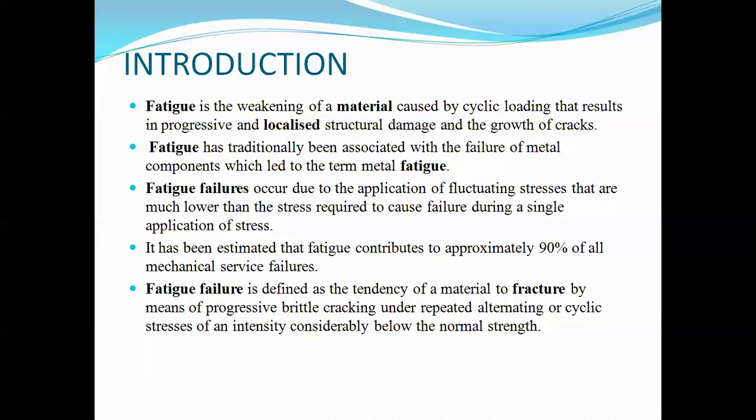Factors governing fatigue failure. Why does fatigue failure take place? Because of stress concentration. What is stress concentration? Whenever there are sharp edges or corners, if a cross section of the material has a sharp corner, then at the sharp corners or curves, stress concentration may occur.

Actually, fatigue occurs due to the applied fluctuating or repetitive cyclic load, due to crack initiation and cracks developed over the outer surface of the material. It can also initiate in the grains or grain boundaries, but it has a tendency to make marks over the outer surface of a material. If a material has such impressions, there is a sudden rise in the stress concentration, and due to this the fatigue failure can take place.

Corrosion is a detrimental effect because, in the presence of corrosion, the core material is enveloped by the oxide layer, and whenever the external load is applied over a body, these layers suddenly break, showing slow progressive deformation, plastic deformation, and fatigue failure takes place.

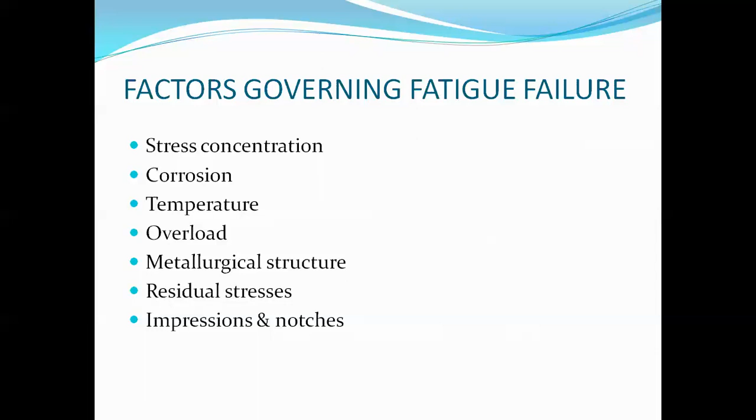Fatigue loading conditions. What are they? Fatigue loading conditions are generally of two types: isothermal fatigue and un-isothermal fatigue. From the name, it is obvious. The temperature is constant; that is why it is isothermal. Stress or strain, these two parameters are variable according to the material or conditions. And here the temperature is variable and the strain is variable, but stress is constant.

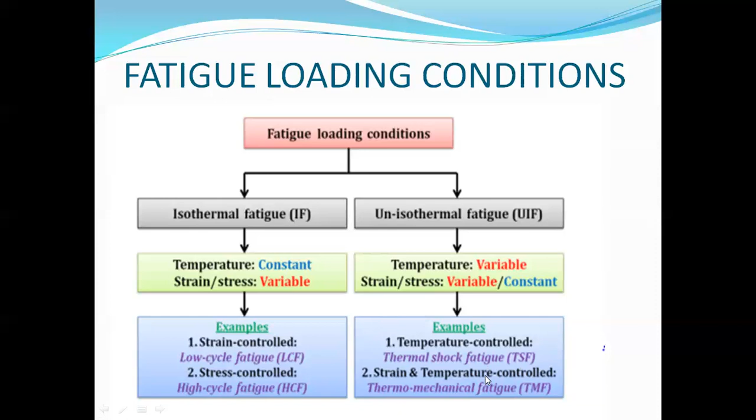Examples of isothermal fatigue: strain control, that is low cycle fatigue, and stress control, high cycle fatigue. Low cycle fatigue is in the range of 10^2 to 10^4 cycles, and generally where the fluctuating stresses with respect to the cycle period go beyond 10^5, that can be called HCF, high cycle fatigue. Here the examples: thermal or temperature control, thermal shock fatigue, and thermomechanical fatigue.

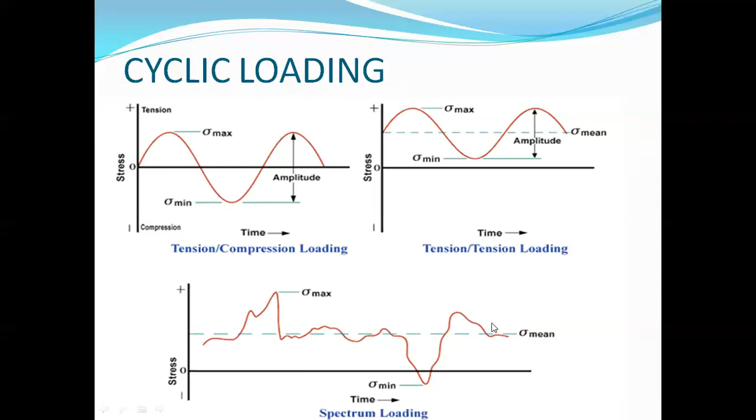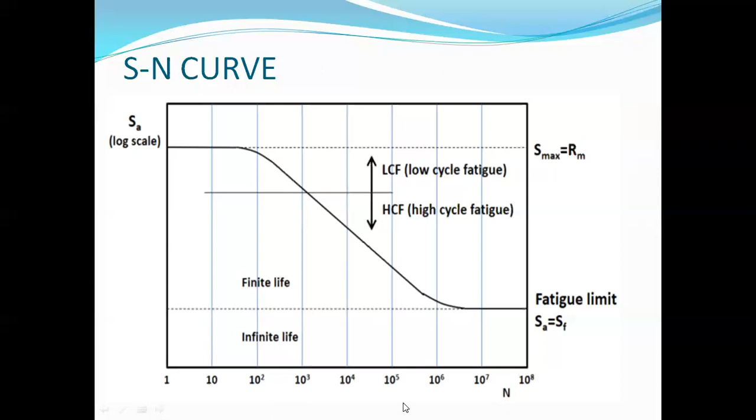And as long as the series of blows over a material increases, then obviously after some time there will be weakening of the material, and it will be seen that at some point the stress of that material will gradually lower down, because the application of the cyclic loading is increased, the cycle time is increased, and finally whenever the material is weakened, the fatigue failure will take place.

And if one material can sustain its life during the infinite period, that is 10 to the power 7 cycles, then the material has a high endurance limit. The endurance limit is adjusted or determined with respect to this infinite life.

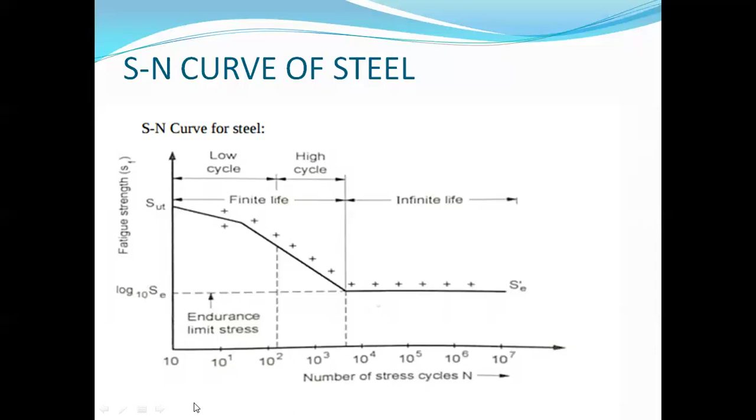Endurance limit. It is defined as the maximum value of the completely reversed bending stress. What is reversed bending stress? Reverse means one is the plus side, one is the minus side. Whenever you bend in concave, it goes to the minus side, and whenever it is convex, it goes to the plus side. Due to the plus and minus, that is a reversed bending stress, which a polished standard specimen can withstand without failure for an infinite number of cycles.

So what is it? It is defined as the maximum value of the completely reversed bending stress which a polished standard specimen can withstand without failure for an infinite number of cycles, usually 10 to the power 6 cycles or more. It is known as the endurance or fatigue limit. If the fatigue limit is high, then the material can sustain its service life under the action of the external load.

The fatigue limit, also known as the endurance limit or fatigue strength, is a stress level below which an infinite number of loading cycles can be applied to a material without causing fatigue failure. Already said that.

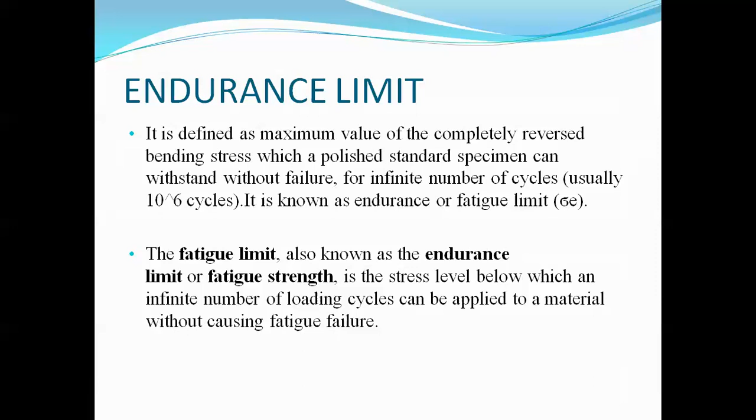Fatigue failure. Fatigue failure generally results from the accumulation of fatigue damage. The damage starts by the localization of plastic strain, which may lead to micro crack initiation within grains or in grain boundaries. Whenever the grain boundaries are weakened, the initiation of the cracks goes on, and it transmits either through grains or grain boundaries according to the material. The growth of the individual microcracks is impeded by the grain boundaries.

Obviously, if the grain boundaries or grains are stronger, then the micro cracks, which would have grown into bigger cracks, are impeded, or hindered from becoming more and more cracks. That is why whenever the number of grain boundaries is increased, the probability of generation of micro cracks is decreased, and those are impeded by the grain boundaries.

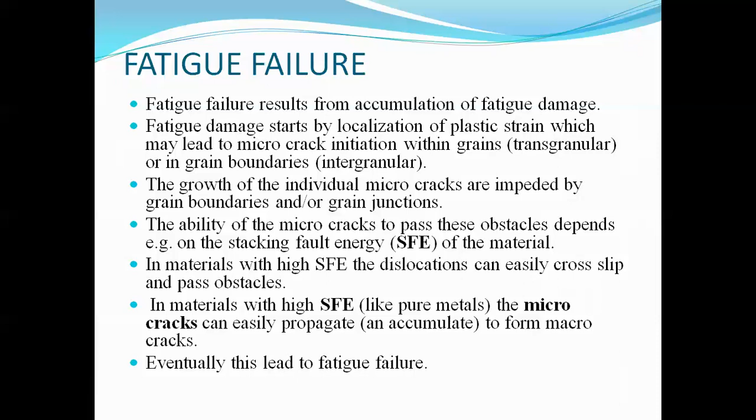Now an example of how the cracks propagate through the grain boundary. Whenever the external loading, the fluctuating stress or repeated stress or cyclic stress is increased and the number of cycles is increased over time, it will be found that the material cannot sustain the external loading. Whenever the weakening of the grain boundaries has been reached, this kind of phenomenon can occur.